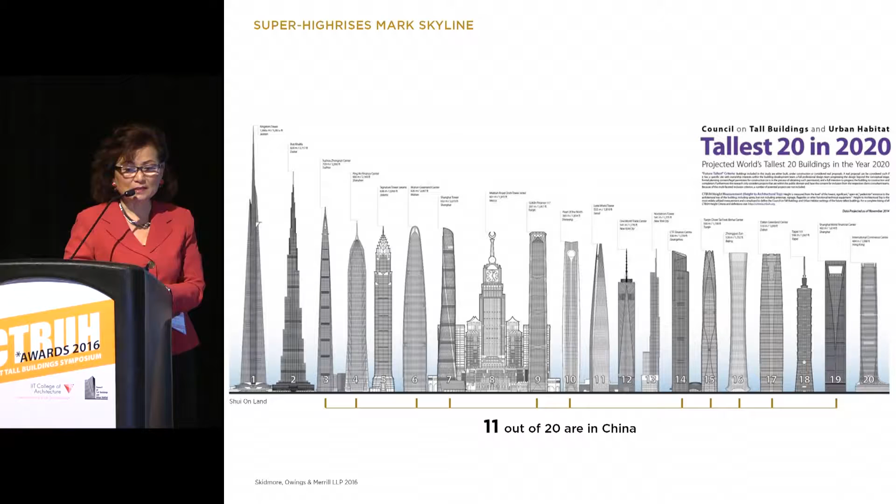And of course, those are problems, but China also has some really incredible high-rise buildings. 11 out of the 20 tallest buildings are in China. So they mark the city's skyline, and also represent the aspiration and technological advance of the cities.

But with all these issues, the country also recognizes the need. In the new National Urban Plan, it recognizes the need to create compact urban development, ecological civilization, natural and cultural preservation, agriculture improvements, people-oriented planning, and the need to transition from speed to quality.

And air, water, soil, and other pollutions are getting worse, and are of heightened alert. There are also natural, historical, and cultural heritage being destroyed. So water quality and quantity are also at serious risk, which is a major concern for the growing cities.

So how do we get all that together? We've seen those goals, and that's why the nation has set up these development goals. These are very new policies. And those are some background for the Wuhan Tiandi project, which was planned more than about 10 years ago.

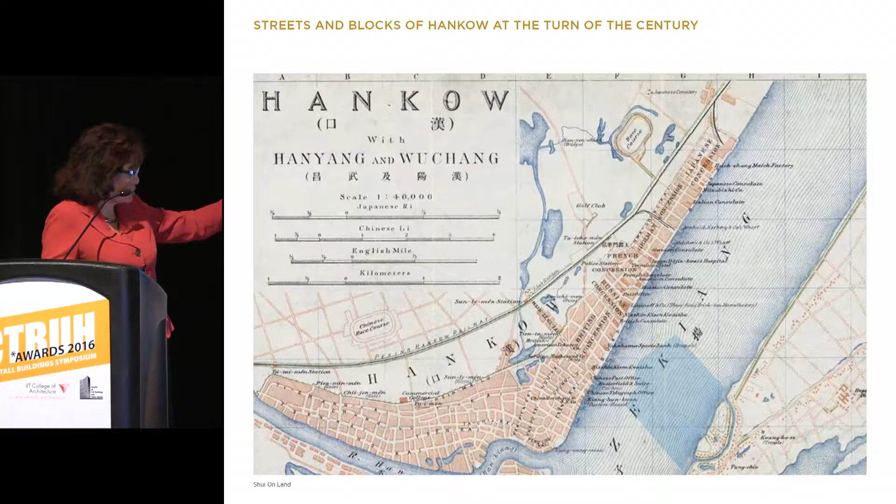The city has always been the industrial area for the center part of China, and it was a trading post. At the turn of the century, the downtown became more European in its character, with the exception of a small part at the intersection of the river that has the traditional Chinese city. It also has a lot of European trading banks and other companies, their little buildings dotted along the river. So it's an eclectic Chinese and European city.

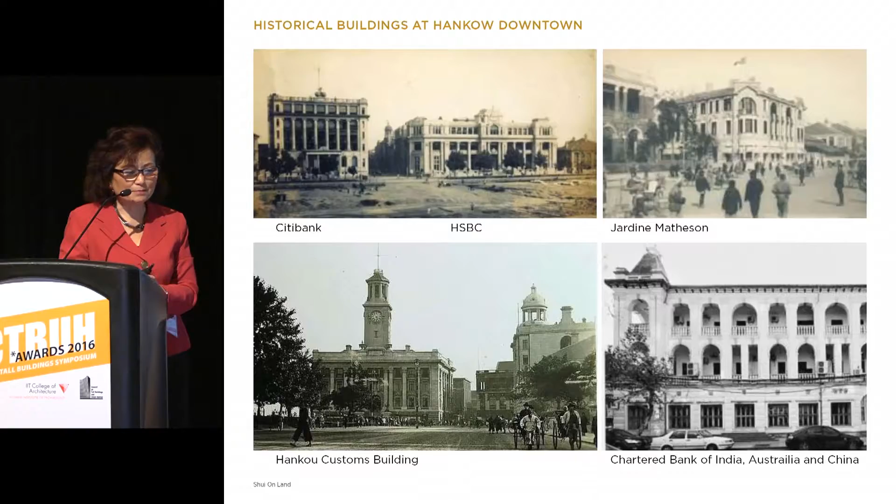So in undertaking this particular development, the developer Shui On Land has a few commitments for themselves. That's what they call their nine principles for master planning.

They are committed to build mixed-use projects. They would like to create vibrant lifestyle centers, walkable blocks, good linkage to transportation. They also want to respect local culture, and are very much committed to environmental sustainability.

Their commitment to environmental sustainability means all their developments will achieve LEED ND certification, and all new buildings will achieve either LEED ND or the Chinese Green Buildings certification. They are also committed to reducing carbon emissions by 20% from their 2011 levels, and all new projects are installed with energy monitoring systems.

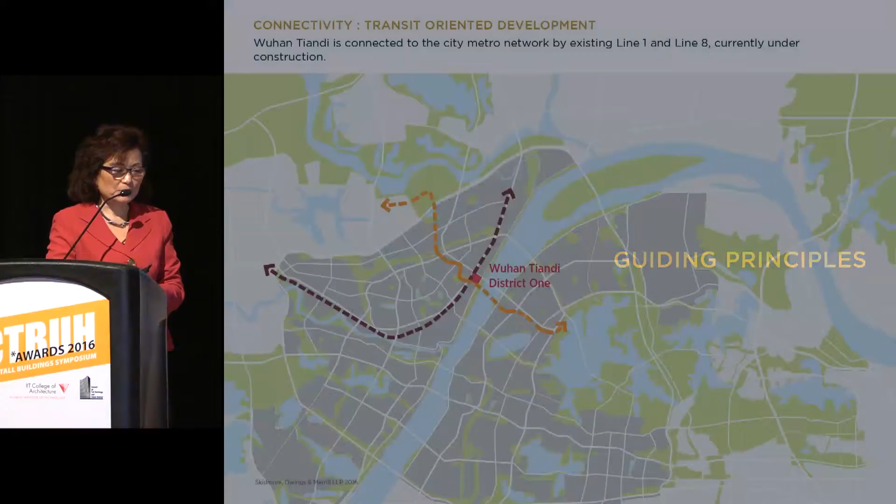So I would talk more about the master plan. There were a few guiding principles we were trying to follow. First is working on site selection - definitely pick a site that has existing transit services.

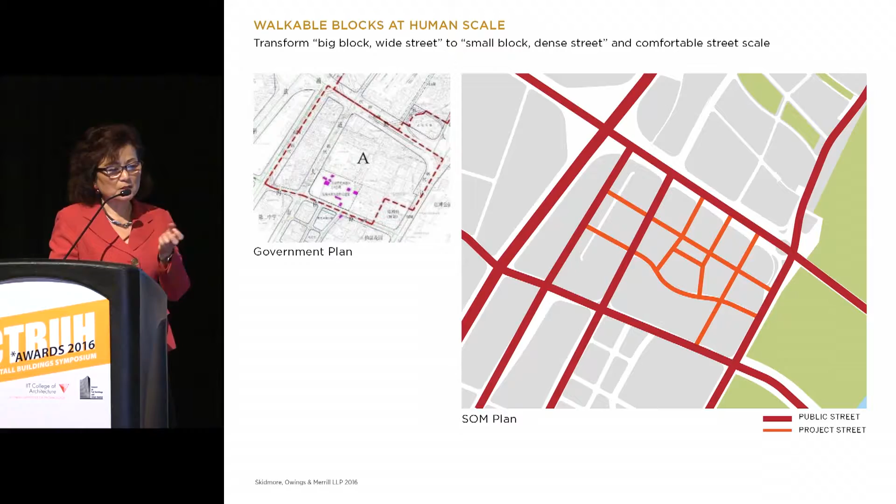Very much the idea of creating human scale walkable blocks, and also creating mixed use, contributing to job-housing balance, and also the vibrancy of a 24-hour, 7-day city.

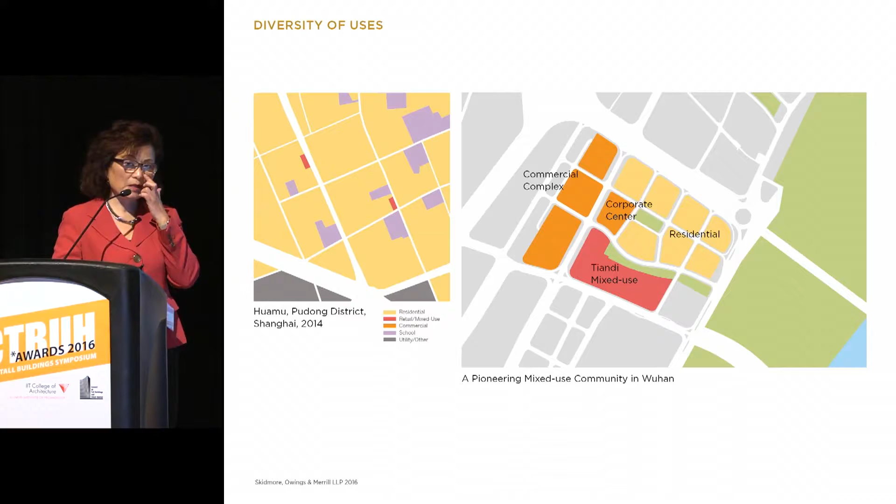You can see that a typical development on the left is pretty much single use - lots of residential with only needed public facilities like schools, a little retail, or business areas totally focused on commercial. This area, shown on the right, has a combination of commercial in red, orange for offices and retail, plus yellow for housing.

This project is also a kind of transit-oriented development, with the subway just on the lower left-hand corner outside the picture. What's interesting here is, as I showed earlier, a picture of Chinese cities with repetition of east, west, south-facing buildings.

Because of the mixed use and also the views to the river, we managed to convince the community to accept buildings not of that similar repetition of south-facing buildings, but create a mixture of different heights, different building types, and even orientation at a slightly different angle.

This is a problem very common in China and also some countries in Southeast Asia, where projects tend to be fenced, gated communities. If the developer owns 10 hectares, it's a 10-hectare community. If the developer owns 20 hectares, it's a 20-hectare community.

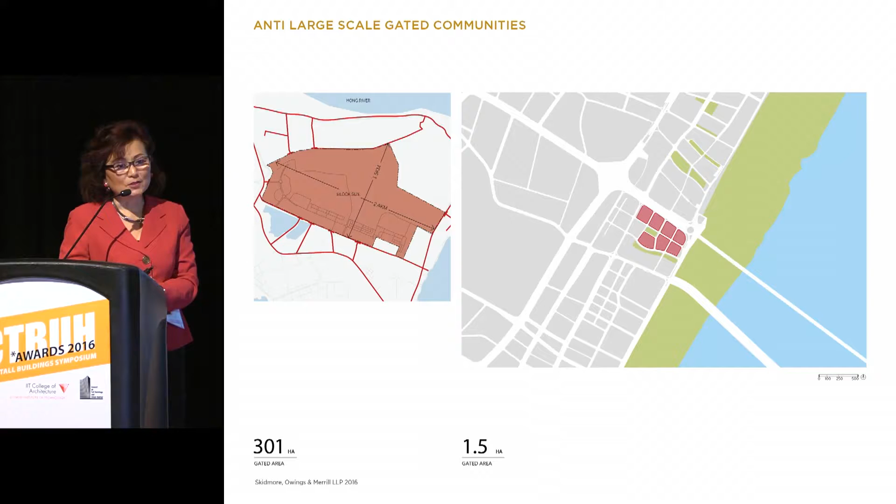In this case, on the left is the 300-hectare development - it's one gated community. So we tested the idea of creating smaller gated communities on a block basis, shown on the right, and it turned out to be very well received by the residents.

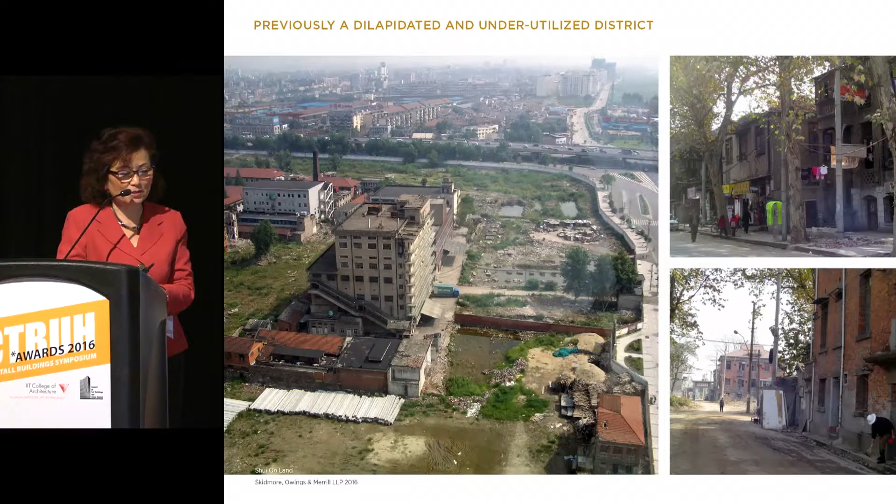Historic preservation is also a very important part of this project. There were some older homes - not really historical architecture gems, but buildings that held the character of a past era. So we managed to preserve many of those buildings and created a place that mixes old and new.

Some of the red roof buildings were the historical buildings, and there were a few not necessarily red roof, mixed together with new buildings to create this interesting historical flavored district.

Some of those nicer buildings were converted into clubhouses, restaurants, and retail areas. There were also quite a number of mature trees, and the developer committed to preserving many of the heritage trees. This allows the composition of heritage trees and historical buildings to give real identity to this part of the project.

And in many of the residential areas, we created newer courtyards surrounded by 5-6 story buildings, which recreate a connection to the historical courtyard houses of Wuhan.

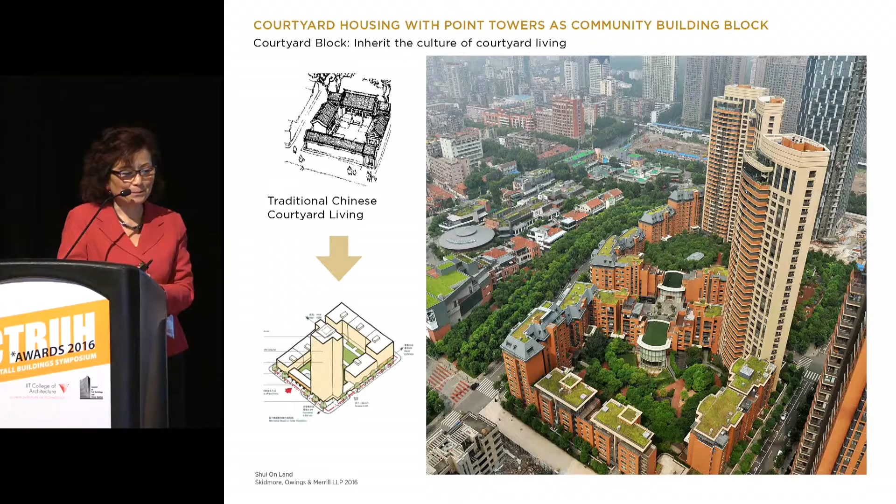They are also, of course, mixed use with many commercial uses, which are more located closer to the subway station, the light rail station on the lower left. And then there's the commercial food and beverage district, with large-scale retail of different kinds.

This was that historical district, which is more focused on food and beverage with small restaurants and also an entertainment complex on one corner. In the design, we were also careful in creating an attractive and exciting path through the area, so you could see a green path loop around the area with the circle roof, a historical building, as the focus.

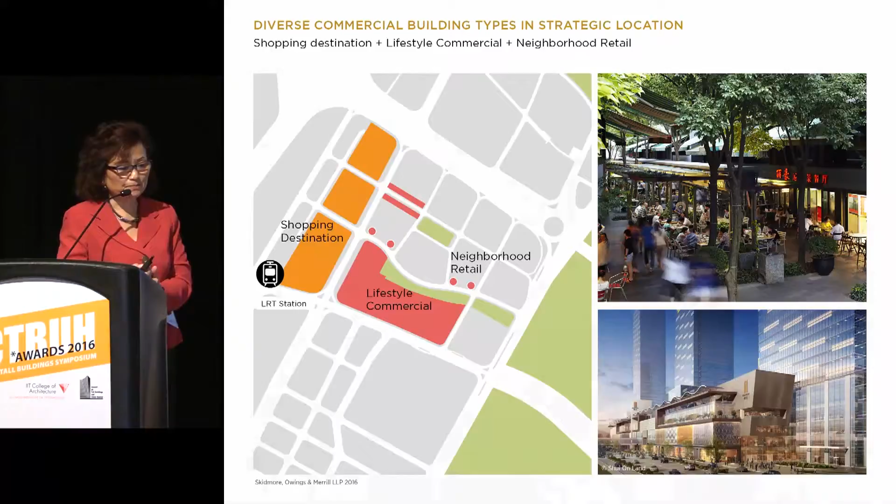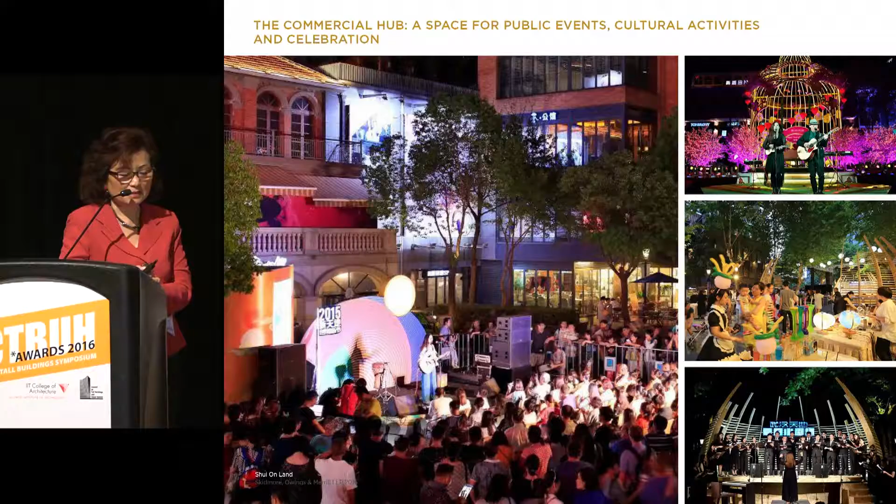Within there, we created very interesting points of community gathering, outdoor dining, but also special places for special events and cultural celebrations. On top of that, there was an art program to install and introduce permanent art in the area, and also temporary expression, where they invite artists to showcase their projects, which change regularly.

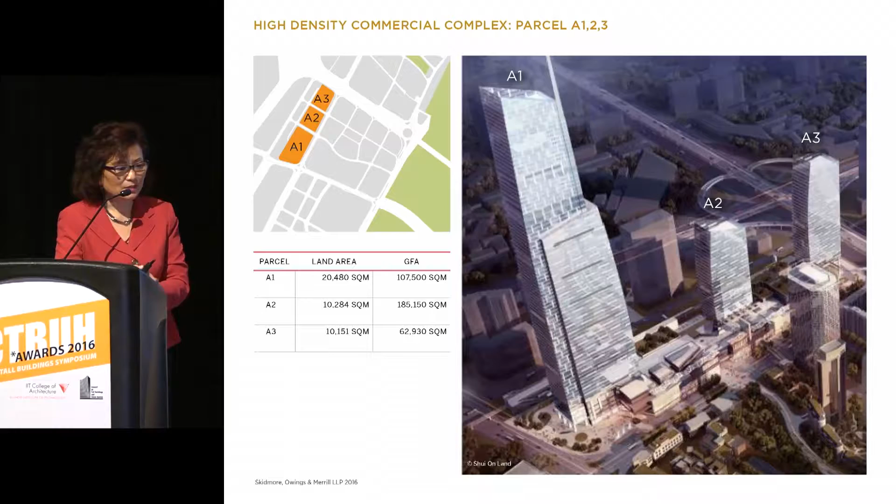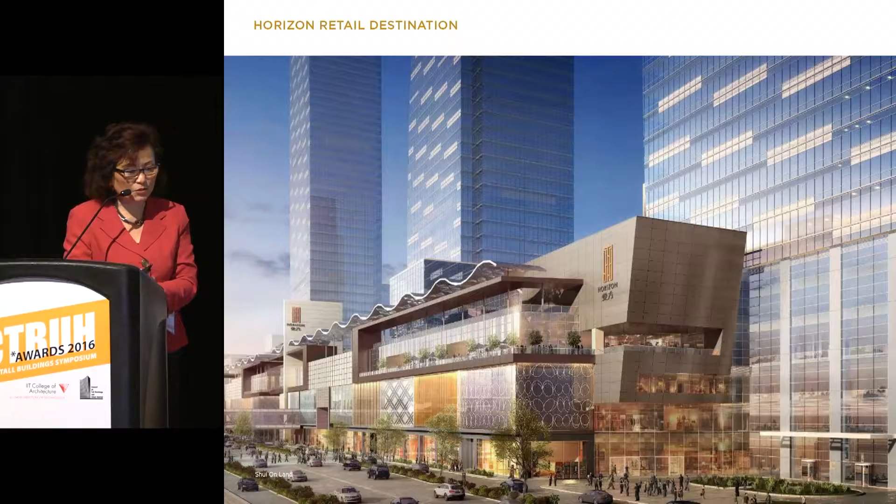In addition to that smaller, fine-grain scale, very vibrant retail areas, there are also larger buildings, office towers with retail on the ground level. So the one I talked about was still kind of small-scale lifestyle food and beverage, but they also have a very large shopping complex, and then an interesting office building. This is one of the landmark office towers near the transit station.

In terms of sustainability, we not only talk about all the different uses and commitment to that through design, we were looking at creating a variety of open spaces, like the longer open space, the finger park—there were a few of them. They not only provide views to the Yangtze River, but also provide different other uses, like here, it's a buffer between the commercial district and residential district.

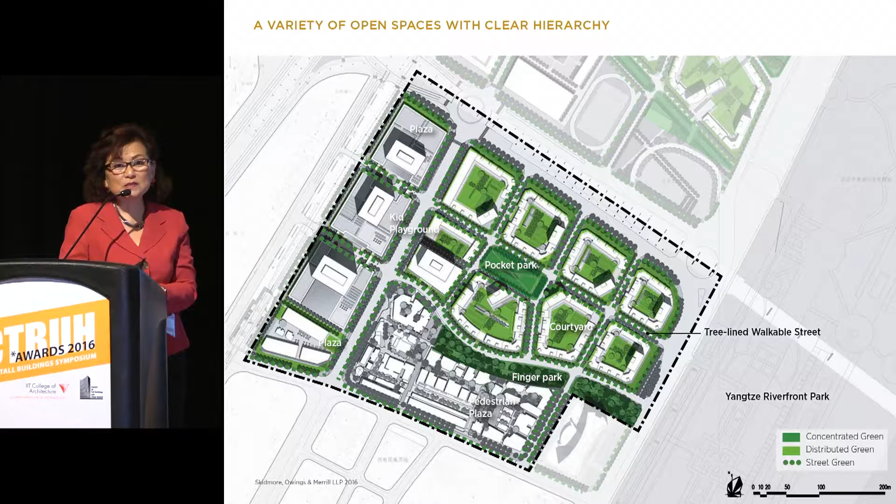Another finger open space was really the center of the community recreation facilities. So many of those open spaces are open to the public. But within each unit we've talked about, the residential units, we have pocket parks that are shared by different blocks and different residential clusters, creating a kind of green street and linkages for the community.

The finger parks also serve the function of creating ventilation, bringing ventilation from the river to the inner side of the city. And we also tried to step the buildings lower towards the river so that more of them get the wonderful view of the river.

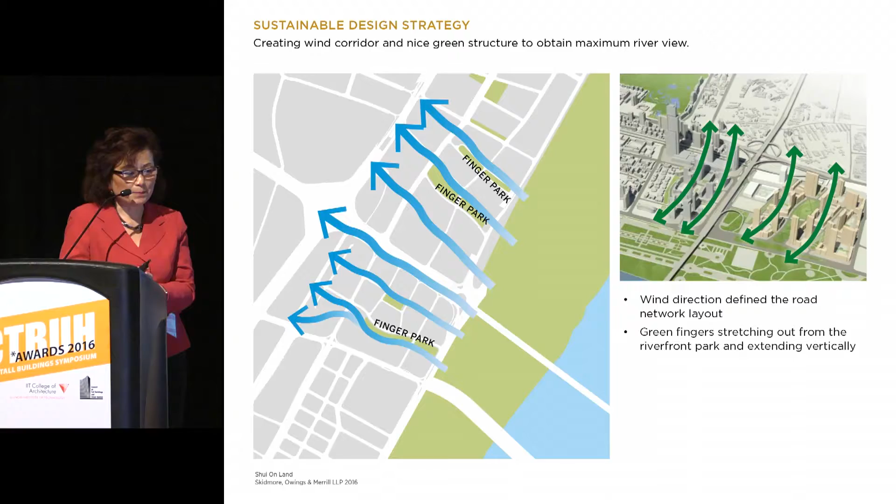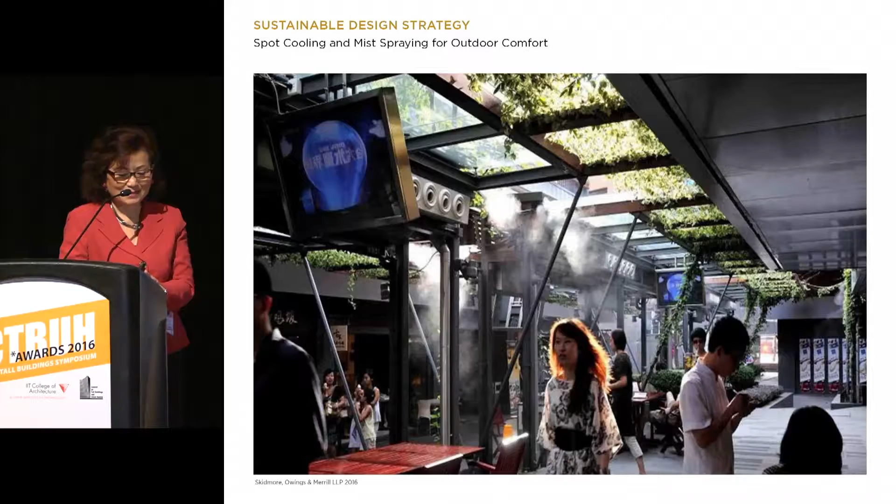In the architecture design, we have also introduced different manners to create a comfortable outdoor environment without the need for air conditioning. So these are little mist systems that are very well liked in the hot summer season. And then there will be green roofs and other features that help achieve the sustainability goals.

So we were trying to figure out locations that may become permanent community farms. This also introduced this urbanized population, especially the younger generation, to their connection to food production and connection to the land.

As I was mentioning earlier, the entire neighborhood plan has got the LEED ND certification, and the new buildings all have different kinds of green certification, either LEED or Chinese green building certification. We were very proud to be part of the team that created this living model for urban habitat, which in many ways is a very popular destination, both for commercial retail and as a living environment.